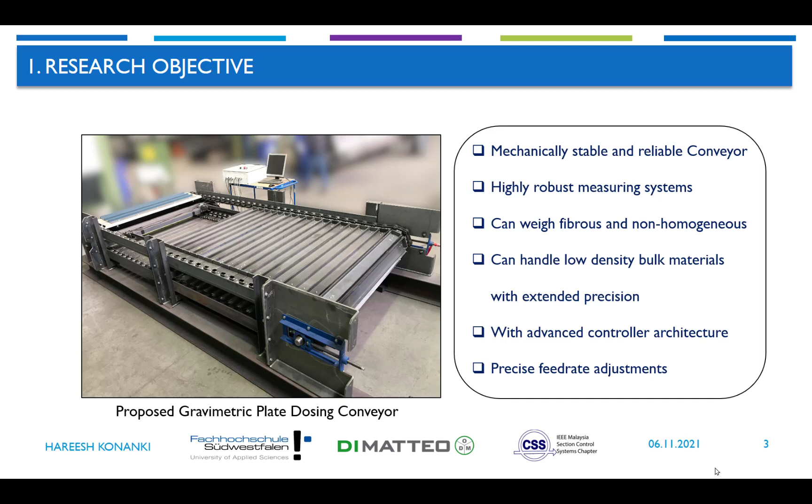The advanced controller architecture developed is expected to maintain a stable mass flow rate and steady mass on the conveyor. For this, the model-based simulation approach has been identified as the potential approach, as it is a smart and economical way to test various industrial test scenarios before building the prototype on the shop floor.

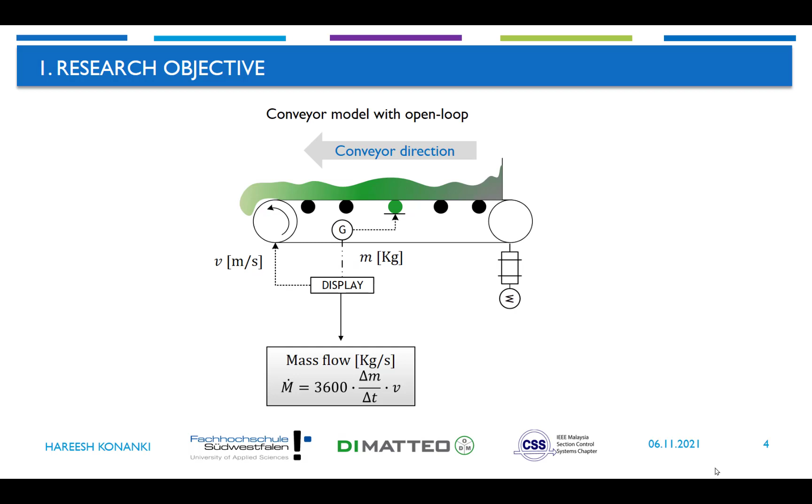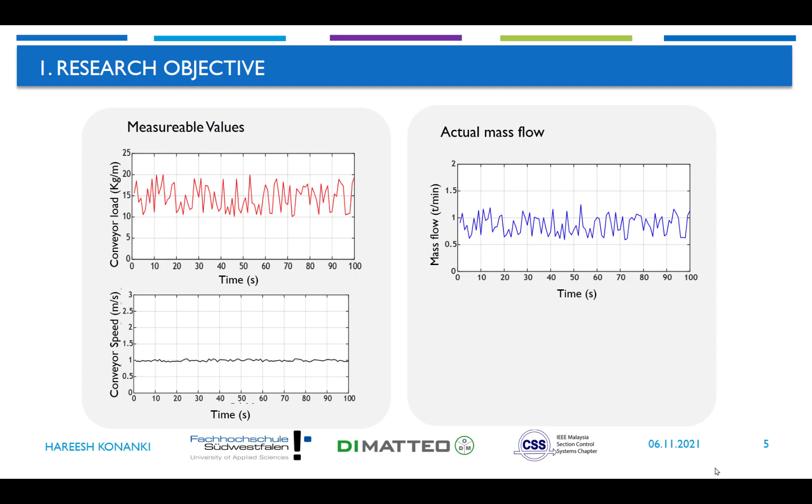As you can see here, the conventional conveyor model needs to be equipped with accurate measuring and feedback systems in the first place to be able to compute the actual mass flow rate, as this would help to design a control loop later on. For example, in this case, the measured values would be conveyor load from the load cell and the conveyor speed from the motor feedback. From these measured values, the actual mass flow rate would be computed, and as of now, as there is no control loop yet, there is no proper control over the mass flow.

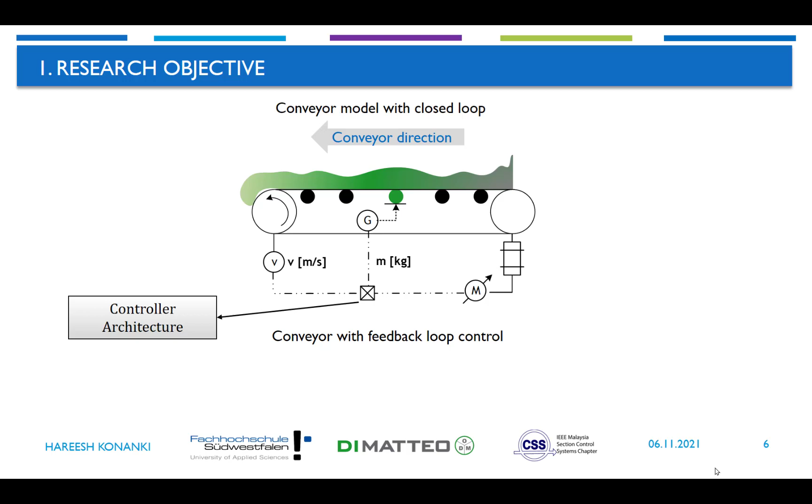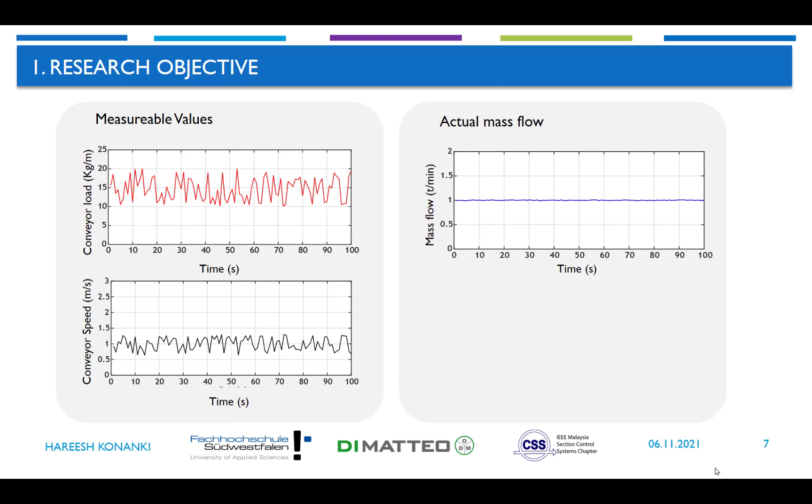However, once the model attains accuracy in computing the actual mass flow rate, the desired mass flow can be attained with a control loop regulating the conveyor speed as shown here. If you see in this case as an abstract example, with the measured values of speed and the conveyor load, the mass flow rate is computed and the control loop model is expected to reach the desired steady mass flow rate by regulating the speed of the conveyor, as shown as an example here.

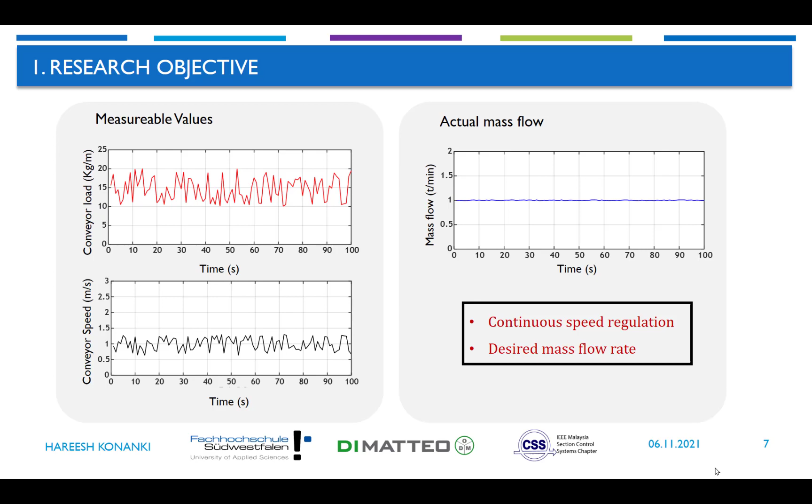Now let me demonstrate the idea of the gravimetric plate dosing conveyor. This gravimetric plate dosing conveyor is a plate band conveyor type where individual plates with a pair of rollers are attached to a chain to form a conveyor. The conveyor is equipped mainly with two load cell stations, one to measure the plate load with no mass on the conveyor, and the other load cell is to measure the conveyor plates with the material on top. The difference between both of them is the actual mass on the measuring length.

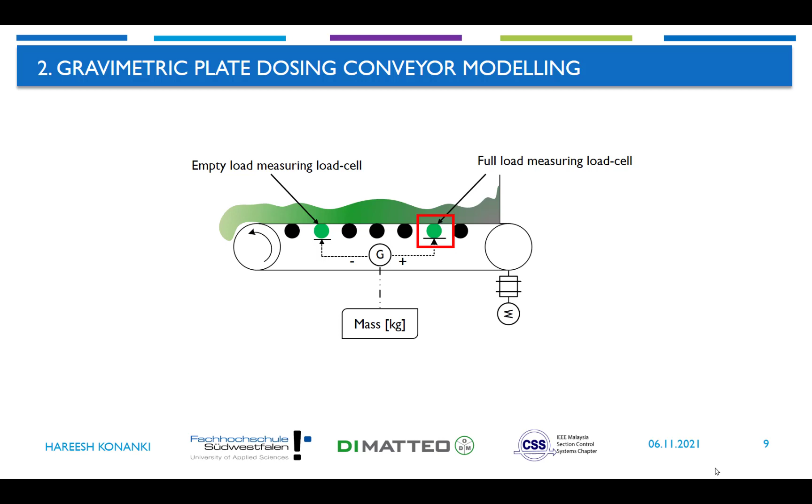I would like to shift my focus now to define how this is achieved mathematically, considering a load cell station that measures the full load. For every iteration of the simulation model, it computes the actual mass on the conveyor using the mass balance on the measuring length. The actual mass on the conveyor is the rate of change of mass from the previous iteration to the current iteration. It is literally the mass that was there before plus the current change in mass. Also, considering Newton's laws of motion helps the model to define a control law to regulate the speed of the conveyor to reach the desired mass flow rate.

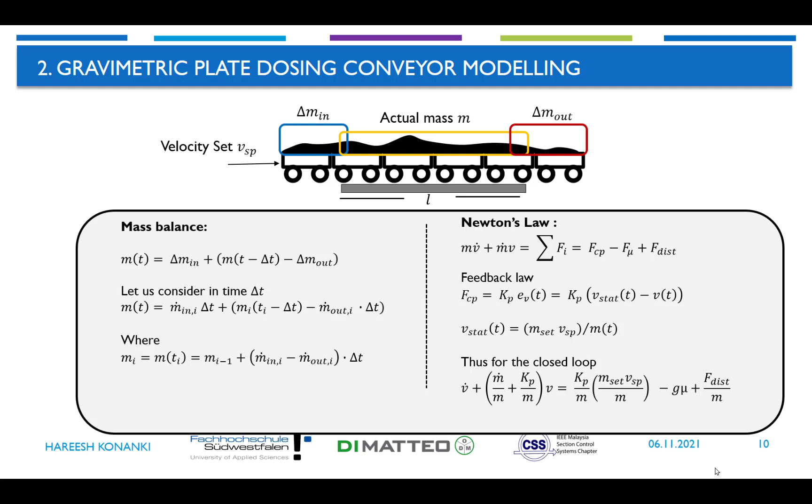Let me show you the plant model schematically here. The input flow rate onto the conveyor is defined by the pre-feeding factor of the screw conveyor here. In an open loop plant, the speed of the conveyor and the pre-feeding factors are adjusted manually.

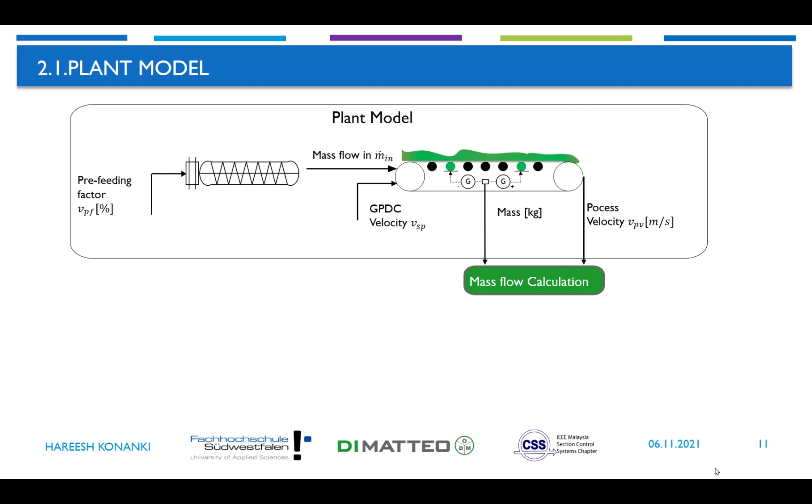Considering the measured values available from the plant model, there are two control loops designed in the controller architecture. The first control loop with a PID attains the desired output mass flow rate by regulating the speed of the conveyor, and the other control loop makes sure to regulate the actual mass on the conveyor by adjusting the pre-feeding factor automatically. Thus, the designed controller architecture not only attains the mass flow rate but also makes sure that the system is safely operating.

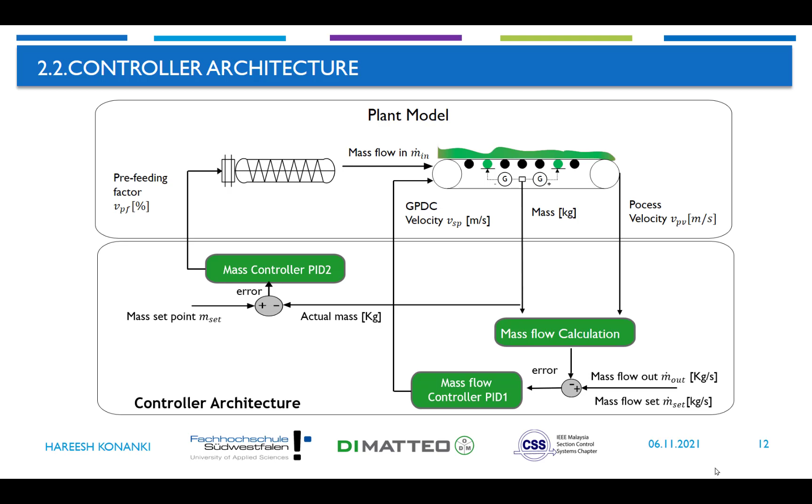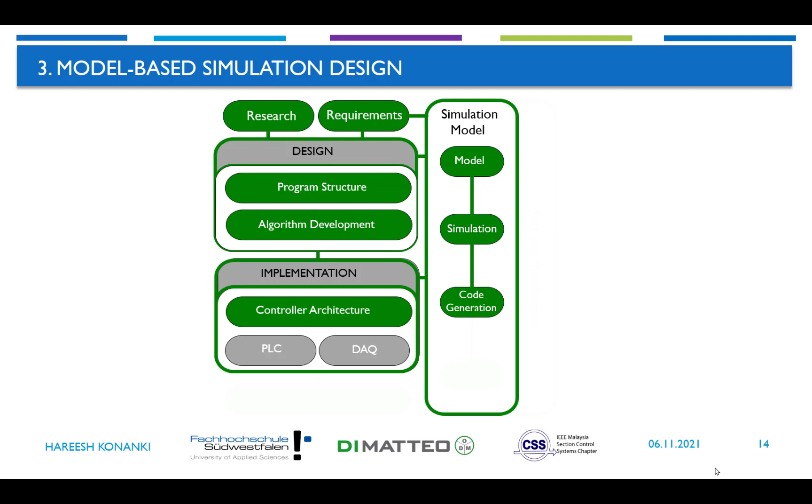Moving on to the model-based simulation design of the proposed idea, thorough research has been conducted and the absolute requirements have been obtained to design the program structure and to develop the algorithm. In the first phase, a basic model has been developed and simulated under different operating conditions. Then the proposed controller architecture has been implemented and tested. The code generation capability of the simulation model helped to generate PLC code and supported testing the model with hardware in loop. Finally, the controller architecture has also been integrated into the prototype and tested to verify the efficiency.

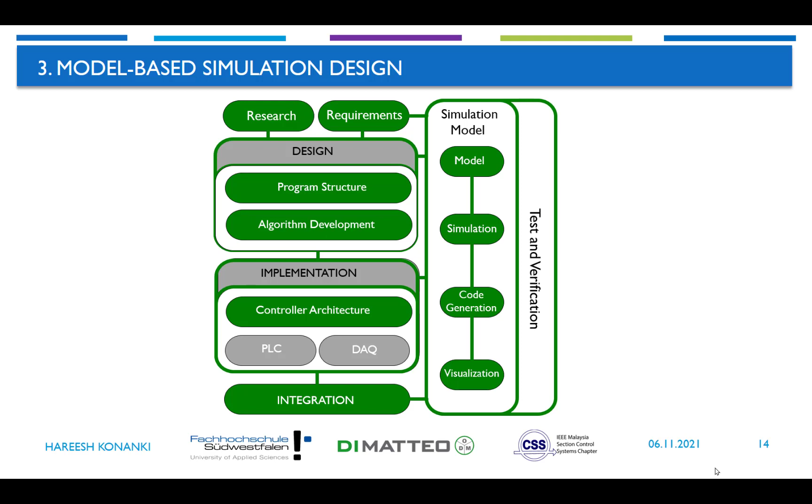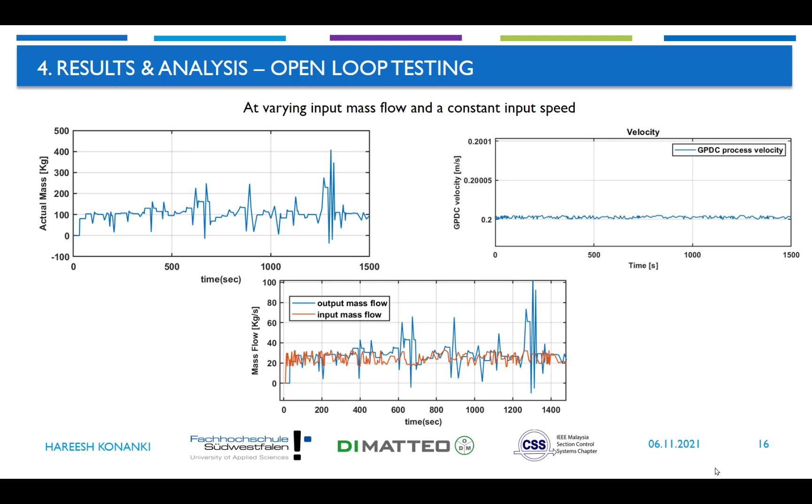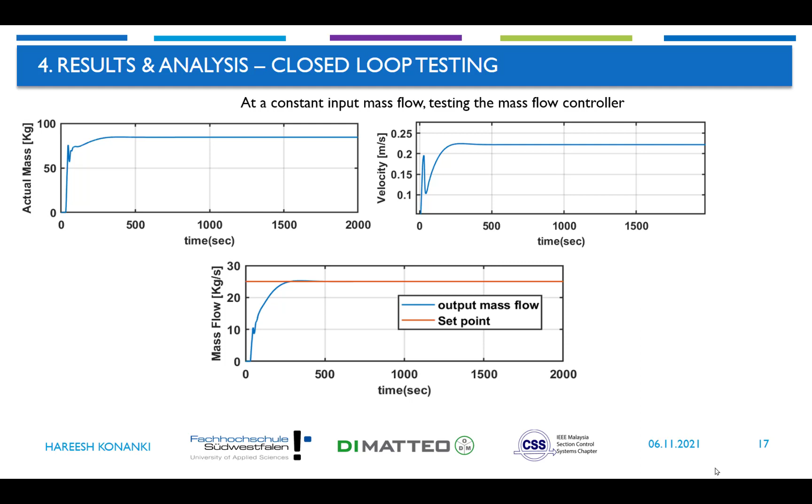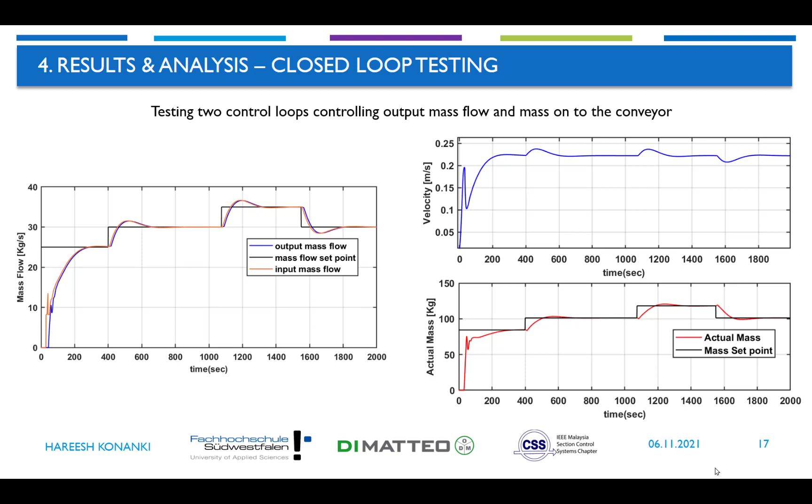Similarly, in closed loop testing, the model is tested at a constant mass flow rate for the desired mass flow rate set point of 25 kg per second, verifying the mass flow controller performance. As you can see here, the controller made sure it reaches the output mass flow set point by adjusting the conveyor speed. Similarly, the model is tested by varying the mass flow rate set point in regular intervals and also defining the desired mass set points. Both controllers controlled the process parameters as expected and the controller architecture performed to its potential.

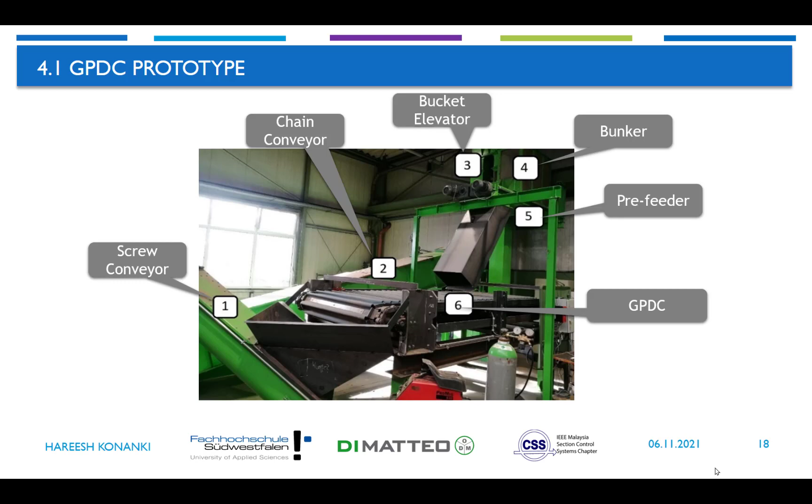I would like to bring you to the final stretch of the presentation where I introduce the real prototype machine assembled at research partner Di Matteo. The prototype consists of a screw conveyor, chain conveyor, bucket elevator, material bunker, pre-feeder and finally the gravimetric plate dosing conveyor, all together with an aim to operate the conveyor at stable and desired output parameters. The prototype model was tested at various operating conditions too.

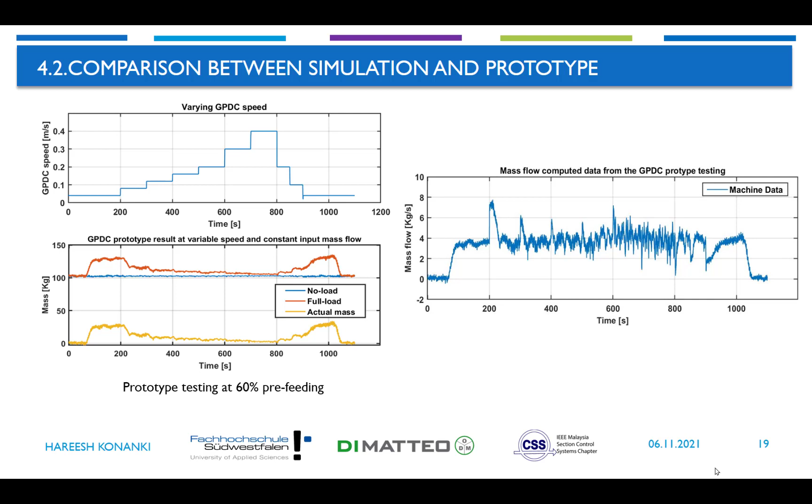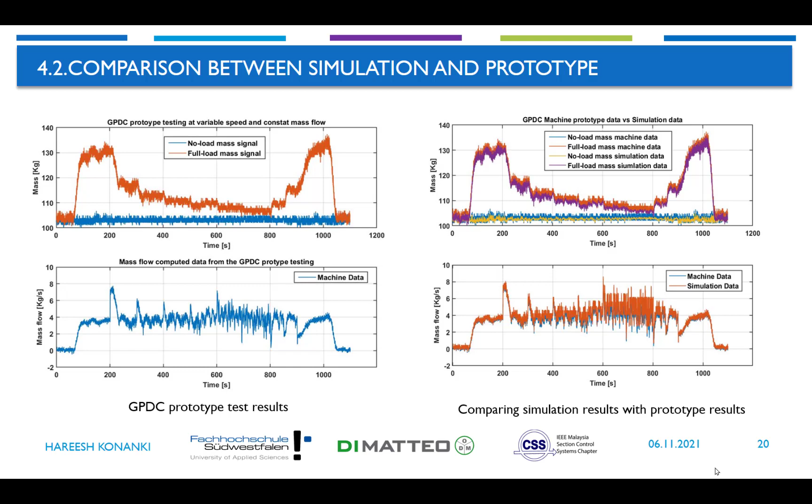To prove the efficiency and effectiveness of the simulation modeling, a test at varying conveyor speed and at 60% of the pre-feeding has been carried out. A varying velocity has been followed for the test as shown here, and the results obtained from the prototype show the relevance of the changes in the mass flow to the change in speed. Similarly, the test has also been conducted on the simulation and the results are plotted against the prototype results and proved to be identical and precisely close as shown here.

In conclusion, as a result of the research, a model-based gravimetric plate dosing conveyor has been modeled and simulated. Accurate metering and measuring technology is developed and coupled with advanced controller architecture to attain steady mass flow. The model is validated with the real prototype data and the effectiveness of the model is proved.